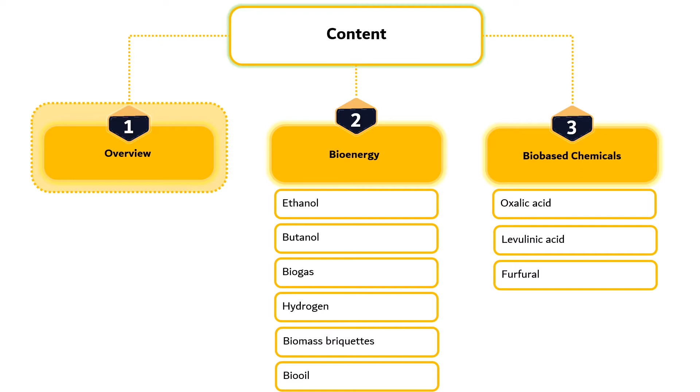Previously, we have discussed the overview of lignocellulose biorefinery product engineering. In this segment, we will discuss bioenergy. Solar energy is the source of almost all energy on Earth. Biomass is a resource produced from the conversion of solar energy.

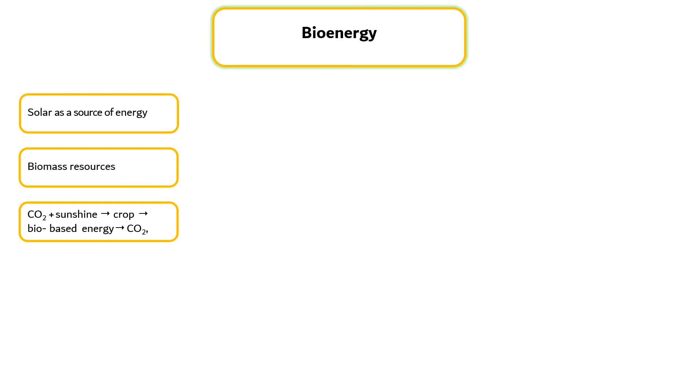Conversion of biomass to bioenergy alternatives of coal, oil and natural gas or other fossil fuels follows the mass cycle with a theoretically zero net carbon dioxide emission, as shown in the right figure. Alternative energy can reduce carbon dioxide emission through improving the energy utilization methods and the utilization ratio.

The ultimate aim of bioenergy research is to reduce our dependence on oil, thus our current challenge is to search for large-scale economically viable bioenergy technologies. In order to realize the industrialization of bioenergy, two key factors are essential. First is the determination and planning of favorable government legal policy, guaranteed huge investment and market demand from consumers.

And second is making constant progress in biorefinery technologies and breakthroughs in key technology. Using different techniques, biomass can be converted into different products. Therefore, with the development of raw material resources, biomass energy, and advanced technology, biomass energy will play an important and indispensable role in human life.

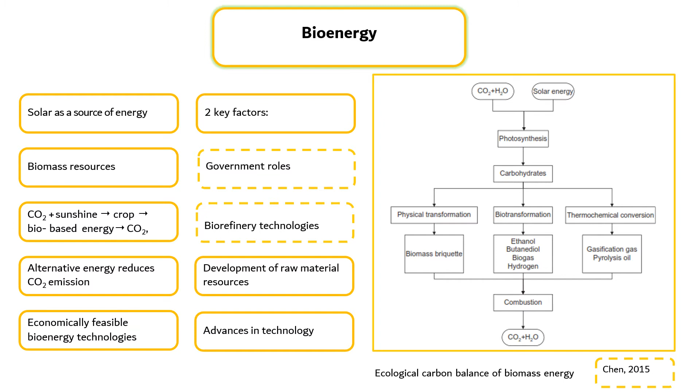The most direct and important application for the bioenergy system is to produce ethanol through biomass fermentation technology. Ethanol is a new kind of green energy as well as a basic chemical raw material that is widely used in the chemical engineering, food, beverage, military, household chemicals, pharmaceuticals, and health fields.

As an excellent fuel, ethanol can improve fuel quality and offers various advantages. More than 90% of the ethanol in the world is produced by fermentation of biomass, so ethanol is a renewable energy source. Among the main materials to produce fuel ethanol are sugar and starch, but since they are edible, the production of ethanol from these materials faces the problem of competing for a resource that is a source of food for humans, and the cost of raw materials makes up more than 40% of the total cost.

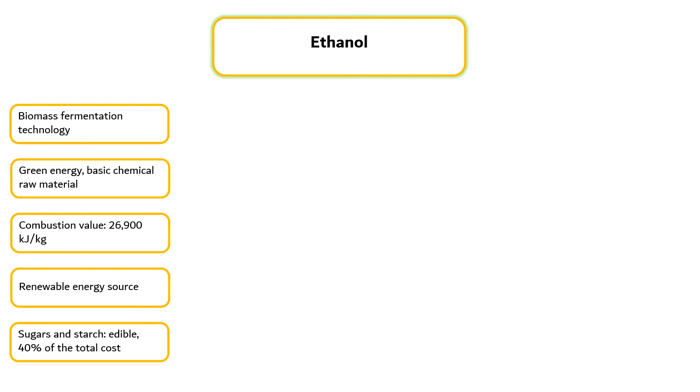Other raw materials are corn stalks, and the process flow chart of fuel ethanol production from corn stalk is shown in the right figure. Lignocellulosic raw materials like straw also can be used to produce fuel ethanol because they are abundant, but their complex structure requires complicated technology routes and results in low utilization rates and high energy consumption for separation, which leads to higher production costs than sugar and starchy materials.

To fully use the lignocellulosic raw materials, the following challenges must be overcome. Technology must be simplified, production costs must be reduced, and wastewater emissions must be reduced.

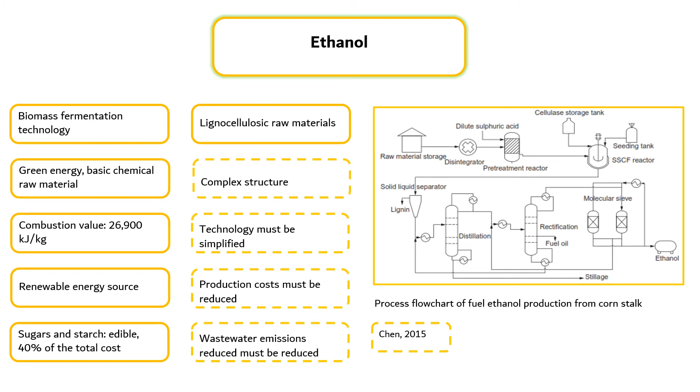Biobutanol is a second-generation alcoholic fuel with a higher energy density and lower volatility compared to ethanol, which is more suitable for the existing fuel supply and distribution systems. Butanol is an important chemical raw material and organic solvent, which is widely used in industry, medicine, and food. At the same time, butanol is more environmentally friendly when compared to fuels from oil refining and hence decreases the emission of greenhouse gases during the gasoline refining process.

Corn, wheat, and molasses have been the primary materials for acetone butanol fermentation for a long time. The flowchart of converting hemicellulose into butanol and the comprehensive utilization of corn stover is shown in the right figure. Raw material costs account for 60 to 70% of the total cost of butanol, which is an important limitation of the industrial development of butanol fermentation.

Lignocellulosic biomass is also a potential resource for reducing the production costs. Since the composition of lignocellulosic feedstock materials is more complex than food and the conversion efficiency is relatively low, lignocellulosic raw materials should be pretreated before fermentation.

The bottleneck for butanol production lies in the low butanol concentration caused by the inhibition of butanol fermentation products. Therefore, it is necessary to adopt a strategy of continuous fermentation to achieve efficient production of butanol and the aim of coupling fermentation with separation technologies.

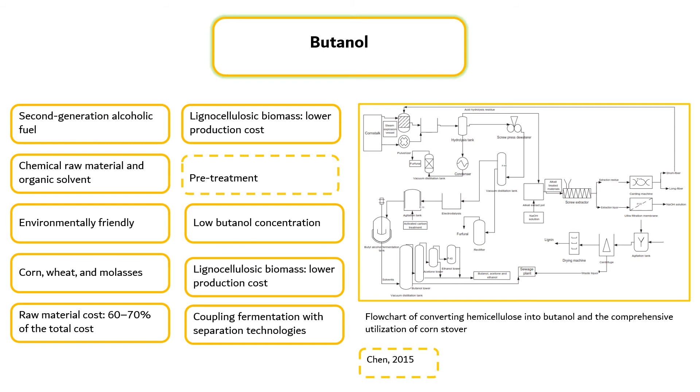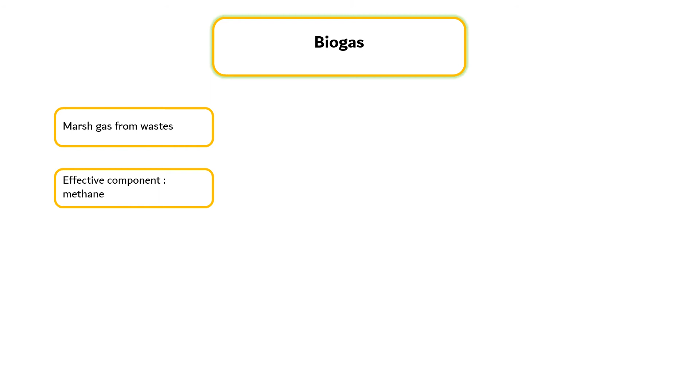Marsh gas is one kind of renewable resource, using waste for marsh gas production by anaerobic digestion. The effective component of marsh gas and natural gas is methane, and the content of methane in purified marsh gas could reach 95%. Biogas can decrease energy consumption, reduce pollution, and construct a platform of rural energy conservation and emission reduction, as well as improving rural health, solving the problem of household energy consumption of farmers, and protecting the environment.

Producing biogas from straw has the advantages of abundant materials and wide distribution without limitations of time and space, which can achieve a complete ecological cycle and effective utilization of straw. Straw is rich in cellulose, hemicellulose, and lignin that contain plentiful energy. Therefore, straw can be used as a potential energy supplier to solve the current security issues related to the energy supply. Through appropriate pre-treatment, bioenergy in the form of biogas could partly satisfy the need of renewable green energy.

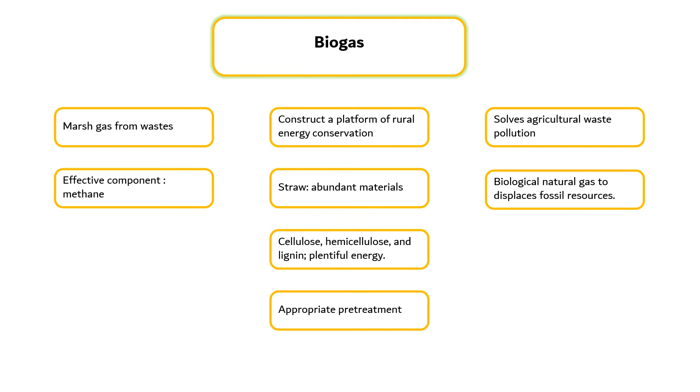In this way, biogas not only solves the problems of agricultural waste, pollution of the environment, and the disposal difficulties, but also produces biological natural gas that partly displaces fossil resources.

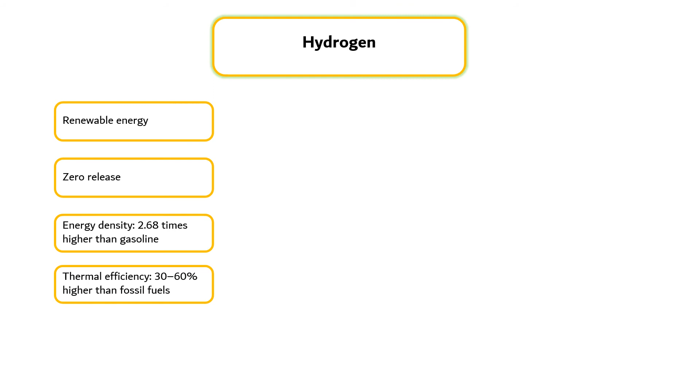Hydrogen itself is renewable and zero release because it does not generate any kind of pollutants, even carbon dioxide, during combustion. The energy density of hydrogen is 2.68 times higher than that of gasoline. Its thermal efficiency is 30 to 60% higher than that of other fossil fuels when converted to power. In addition, hydrogen can serve as fuel for engines directly. At present, hydrogen is used as an alternative to fossil fuels in hydrogen fuel automobiles and hydrogen fuel cells.

However, it will not meet the need for sustainable development over the long haul. High cost is the main problem restricting the industrialization of hydrogen production. Dark fermentation coupled with biohydrogen production technology could integrate effluent treatment, solar energy utilization, and clean energy production organically and form a new kind of environmentally friendly industry. However, future research is needed on both dark fermentation and light fermentation for hydrogen production from industrial and agricultural wastewater, municipal sewage, livestock wastewater, and lignocellulose biomass materials, which could decrease production costs and help protect the environment at the same time.

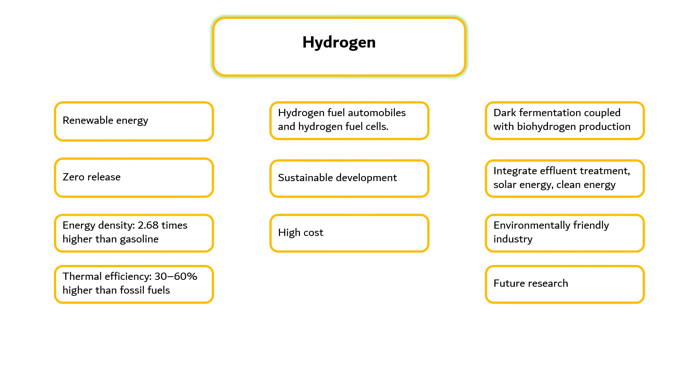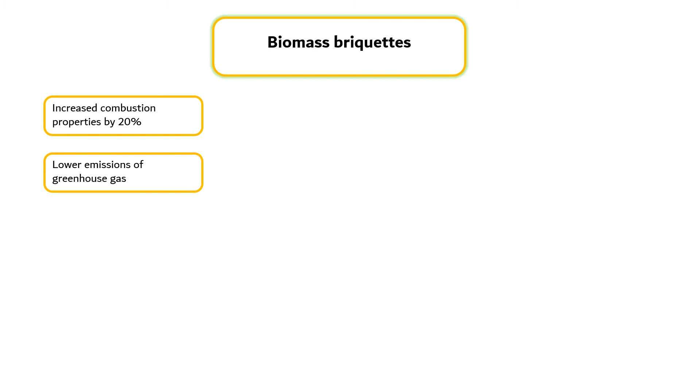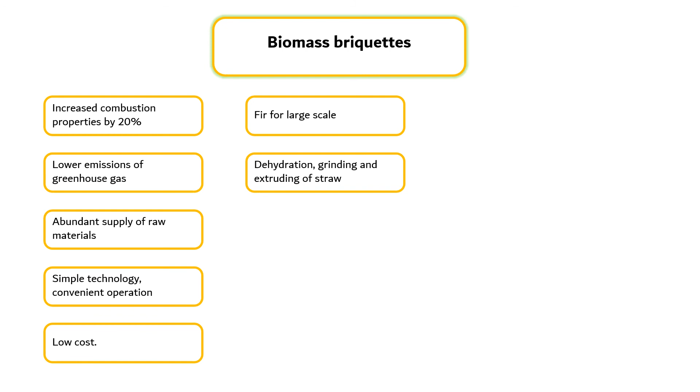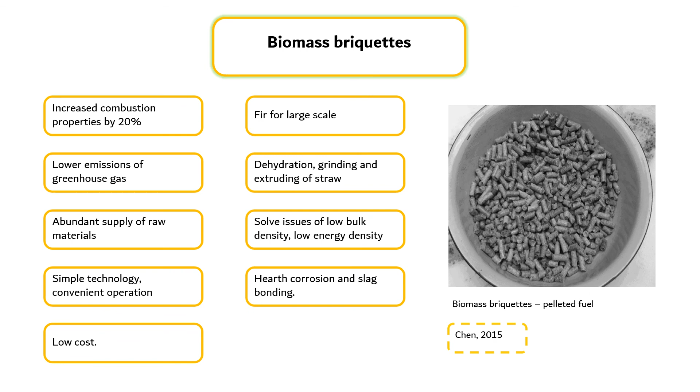Biomass briquettes solve the problems of low bulk density, low energy density, and difficulty of storage and transfer. However, the main problems of biomass briquettes utilization are hearth corrosion and slag bonding. Hence, further modification is required.

There are several commercial values for bio-oil that need to be highlighted. First, bio-oil can completely dissolve in alcohol. Second, bio-oil is insoluble in diesel oil, although it could be emulsified by diesel oil. Third, the quality of bio-oil can be improved through catalytic reforming, which is similar to that of petroleum. Bio-oil can be gasified or converted into manufactured gas, biodiesel, or biomethane.

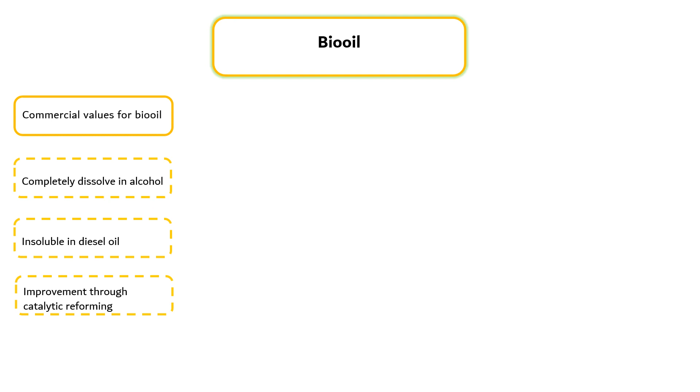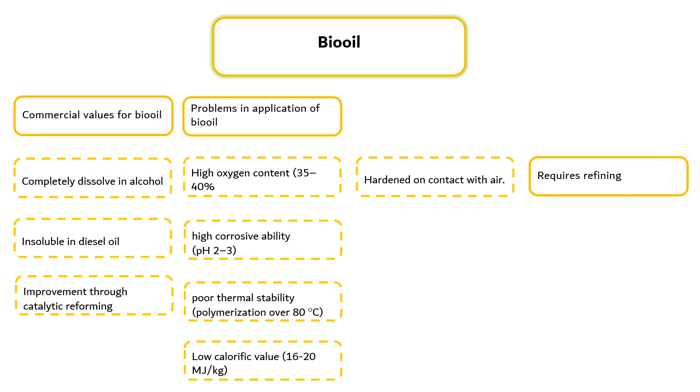There are several problems in the application of bio-oil, such as high oxygen content, 35 to 40%, high corrosivity, poor thermal stability, high viscosity, and low calorific value. Such properties restrict the application of bio-oil as an engine fuel. Moreover, due to the high oxygen content, bio-oil is easily hardened on contact with air. Therefore, only after refining could bio-oil have the potential to partially displace fossil fuels and be used in existing thermal equipment, especially in internal combustion engines.

For the next segment, we will discuss bio-based chemicals.